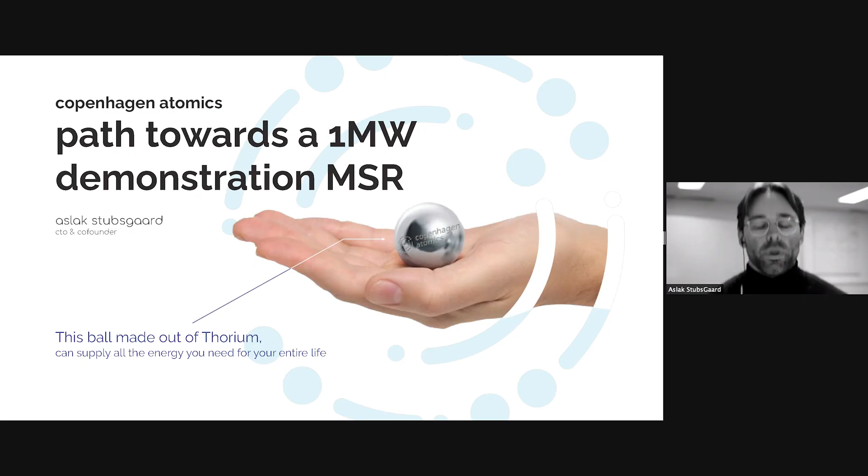I'm the CTO and one of the co-founders of Copenhagen Atomics. The company was founded back in 2015. All the components and systems that have to work together seem to be the risk of building reactors.

So we started building all the subcomponents that would go into that design, building the supply chain to build our reactor. Before building commercial reactors, we want to build a 1 megawatt demonstration reactor, maybe even several 1 megawatt demonstration reactors with different materials and geometries.

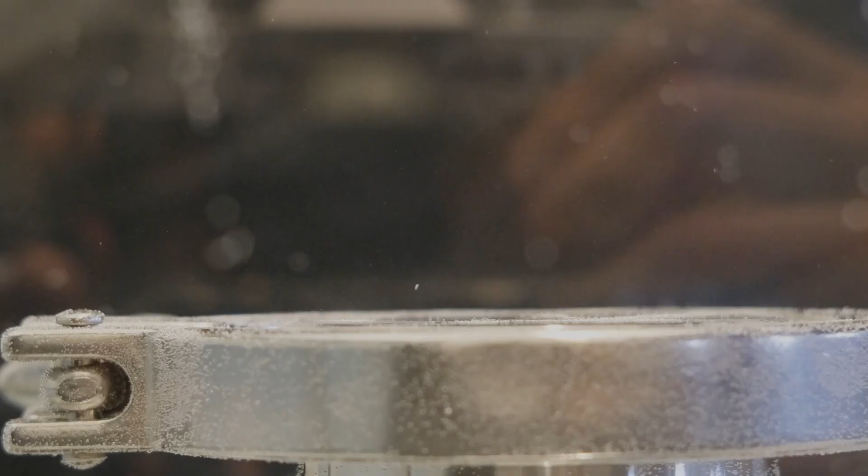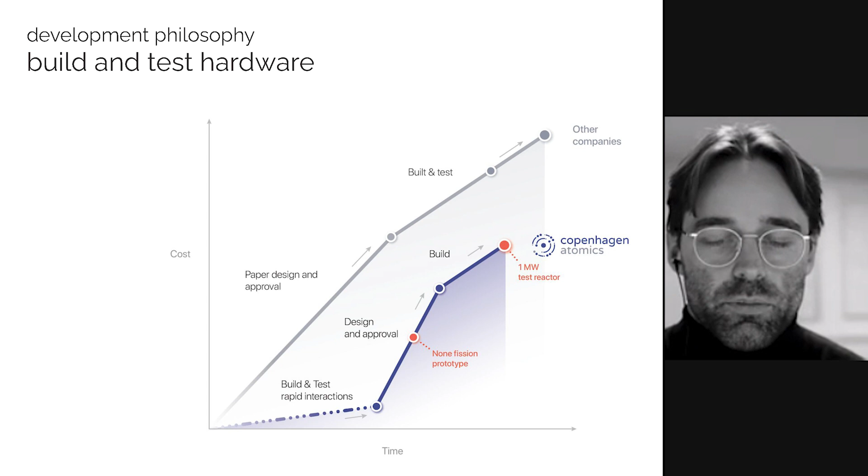We see this as an approach where we can move faster in the beginning and test all the components with inexpensive stainless steels and inexpensive salts before we ever get to any nuclear part where we have to involve regulators and any change becomes very expensive. Earlier this year, we then got funding to build a non-fission prototype for the next coming 2 years. We started building and selling these loops all the way back in 2017.

Here in 2019, we had basically all the components we need for a bare bones boilerplate non-fission prototype. This non-fission prototype is basically a 1-to-1 scale 1 megawatt demonstration reactor that fits inside of a 40-foot shipping container. It has all the same features, but scaled back. So for example, vacuum spraying, we might not implement that yet.

It's all the key components like pumps, core, the heavy water, and the separation materials. They might just be stainless steel in the beginning, and it might be a heat exchanger and the dump tank, the bare bones minimum of a 1 megawatt demonstration reactor.

We also sell these loops commercially, starting at 88K. So that's a bargain. Fuel salt loop inside the furnace that is then encapsulated in another shell. Both of those containments then have argon inert atmosphere. And then we have an air conditioning to keep all the electronics, actuating and VFDs cooled.

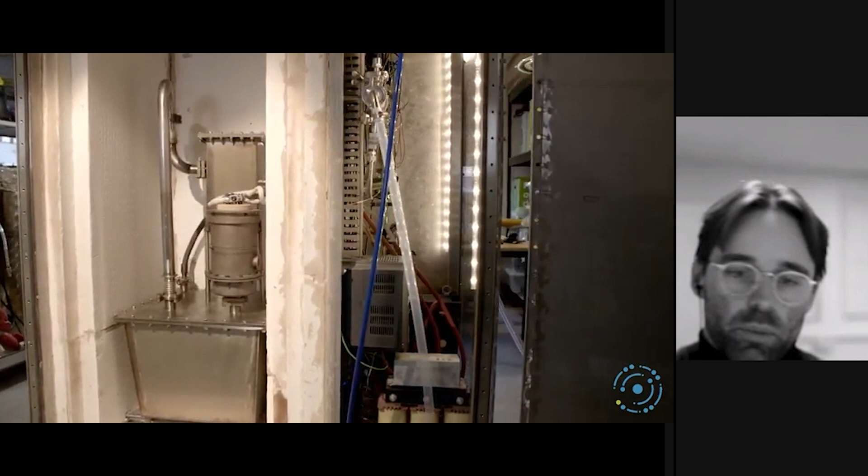Then you see here our older version of pump inside the loop; we can put in different components and pump salt around, run different tests with the different kinds of salts. We always start testing with water, and then we move on to nitrate salts, which is also what they use in the solar power industry, but that has a limit of 560 degrees Celsius. And then we move on to FLiNaK, which is our main testing salt for fluorides.

You see here an ingot we produce in 1 kilo batches, where we have to purify them before we can put them in the loop to eliminate moisture and oxygen. If we turn the light off, this is one of our pressure-fed loops with FLiNaK at 700 C. You can see it's glowing red hot.

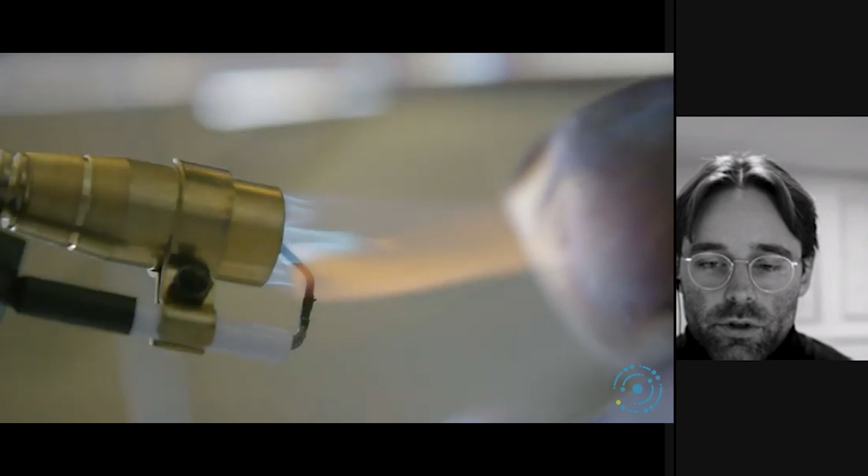This is showing nitrate salt. The viscosity and fluid characteristics are very similar to water. The nice thing about the nitrate salts is they allow you to test things without needing inert atmosphere. It's a lot easier to handle. They have lower melting points. Then we usually go on to FLiNaK and test with that.

Here I'm showing silicon carbide tubes at 900 degrees Celsius. We're getting tubes from different vendors and then stress testing them by dunking them into room temperature water, simulating a worst case accident in one of our cores if water spilled past its containment into the insulation layer and directly onto the silicon carbide.

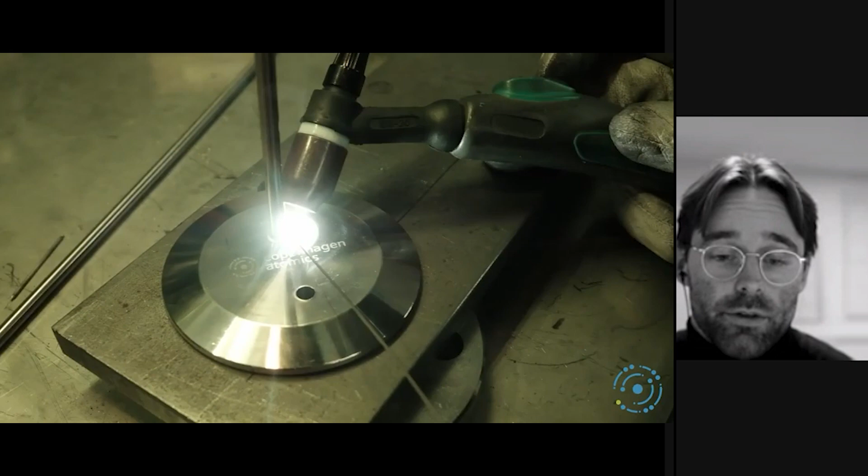We use Alfa Laval a lot for assembling our loops. They have world-class machinists and welders. We source all these parts, forged, investment cast, stamped, molded, assemble them here in Copenhagen and build these loops from them. We have something like 200 plus suppliers.

Molten-salt reactors, by their nature, lend themselves to be miniaturized and put inside of the size of a 40-foot shipping container. The reason we want to do this is because our whole goal as a company is to mass produce molten-salt reactors on an assembly line so we can have a reactor that can scale to meet global energy demand in the future. So the idea of the company is just that we build the reactor.

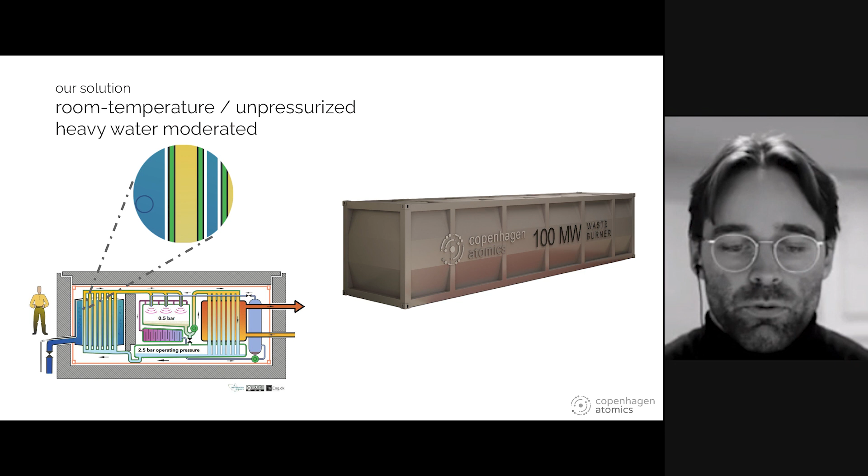We don't build any of the power conversion cycle, scrap the idea of a freeze plug and just have the salt go through the dump tank responsible for decay heat removal when it's under shutdown. Use vacuum spraying, which is spraying the entire salt volume just upon leaving the core to extract as much of the volatile fission products as possible. Recirculate the helium through scrubbers and filters to separate out the fission products.

If we just extract the xenon and krypton just upon leaving the core, because the fission products decay through multiple elements towards the line of stability, we can actually extract quite a big margin, up to like 15% of the fission products, if we capture them while they're being created. If we can then also extract some of the other volatile fission products, we extract a much larger fraction of the fission products, with the goal of a breeder in the long term.

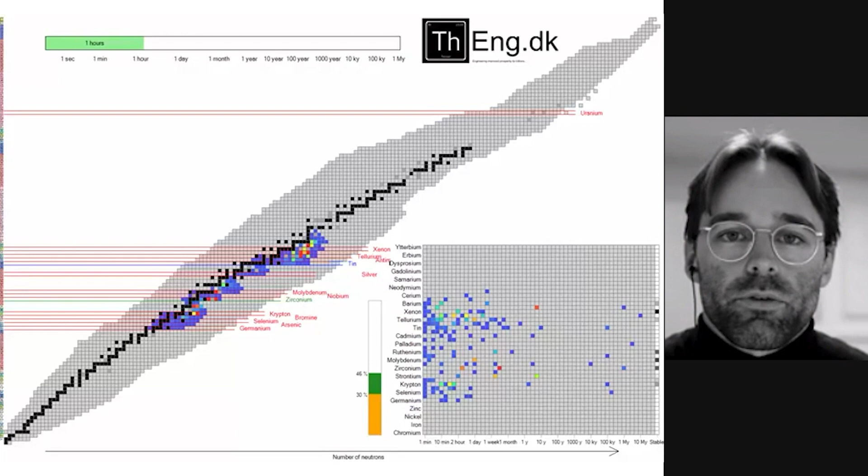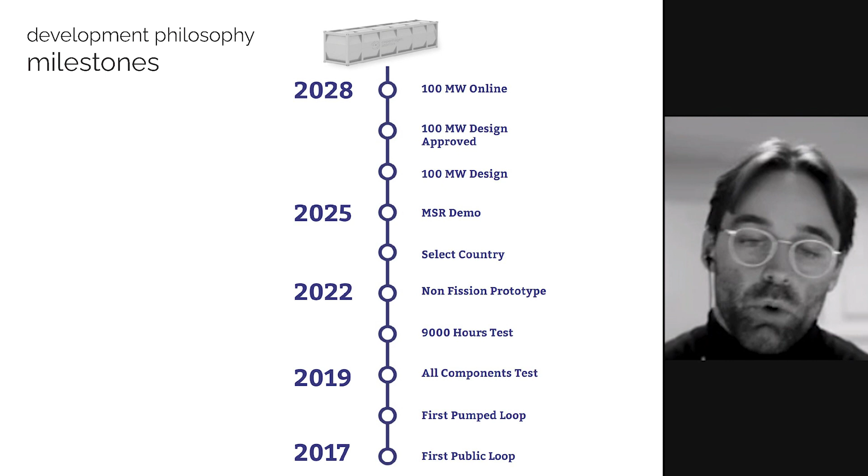And so you might think that this is trying to build something similar to what they did in the MSRE, but it's actually more akin to what they did in the Aircraft Reactor Experiment, which was they built a 2.5 megawatt thermal molten-salt reactor, small core geometry, and they only operated it for a couple of weeks. If we can only get approvals to operate it for a couple of weeks, that's what we'll do, but a couple of months if we're allowed to.

The key difference being, of course, that we want to use heavy water and then insulation material between salt tubes. We would like to use silicon carbide here or silicon carbide composites or some other variants of that, but if we can't get it approved in time, we'll just use stainless steel for the brief life of the reactor.

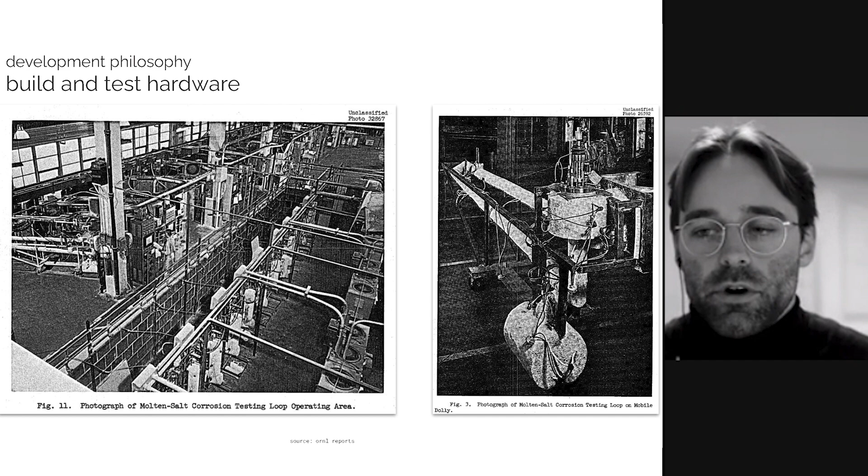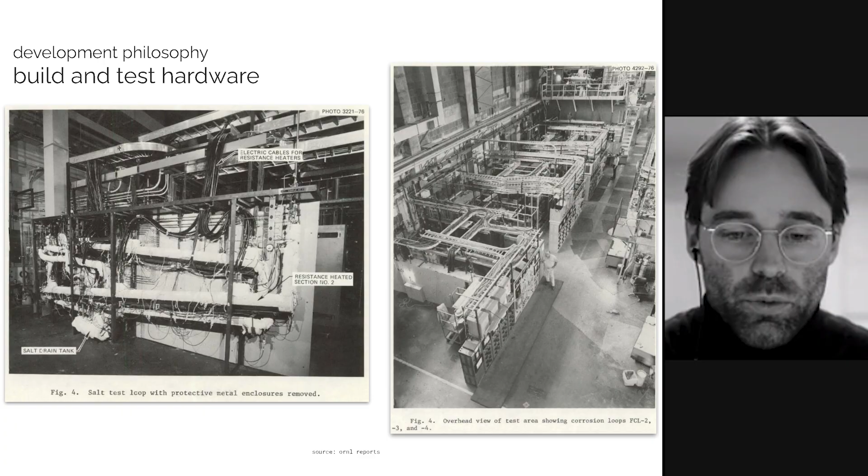And even after the MSRE days, buildings filled with loops. This is sort of similar to what we're trying to do. We're making the loops a lot more compact. There was a lot of piping between the different components. Our approach and design ideology is that our containerized reactors basically have all the electronics, heating system, and gas system management inside of tight containment. And you see here some of the loops we built since 2017.

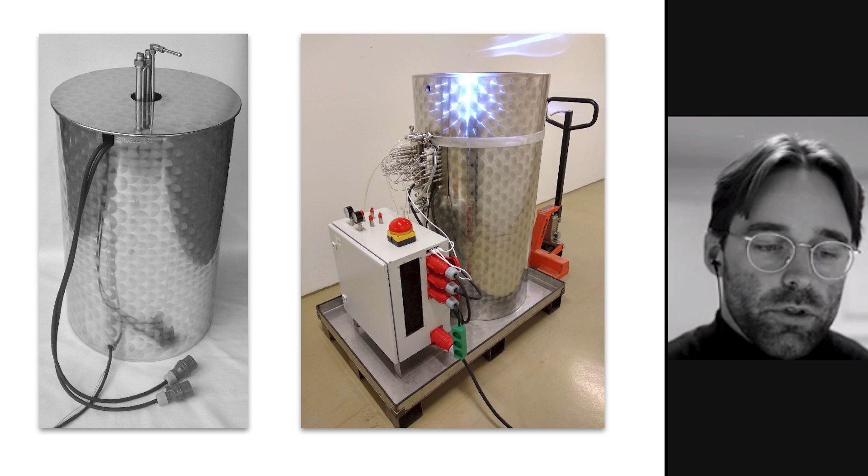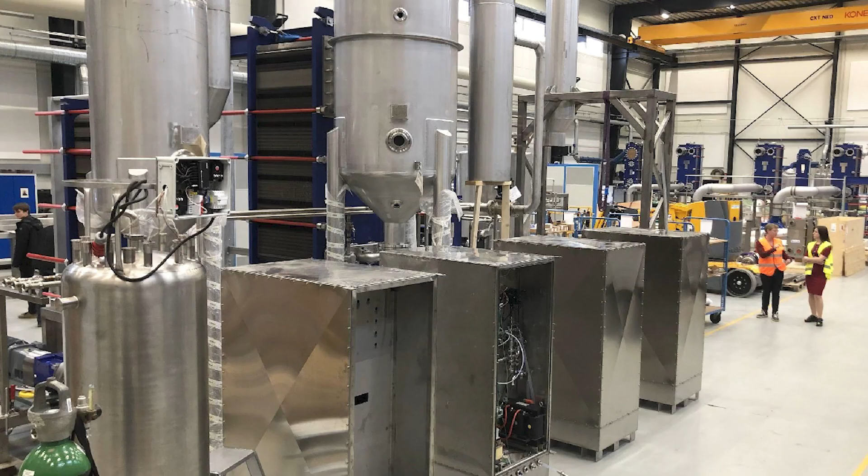The first one was a pressurized fed loop, and now we're currently on our fifth generation of loops, which has more or less the same capabilities as some of those loops you saw at Oak Ridge, just compressed down a lot more. We need a lot more of these loops, and we're happy with the design, so we're scaling the production of them. We're building some other systems, like a 500-liter solar salt loop.

What allows us to do this is our pump, a canned rotor pump, which is very different than the cantilever type pump they had in the MSRE days, which basically has a pump at the bottom, a long shaft and a dynamic seal, and then a motor at the top that you keep cold. This design is compressed into a canned rotor pump, so the rotor and impeller are together, actuated electromagnetically, and that allows us to just weld the whole thing up and not have any dynamic seals.

We're currently looking at building a version of this with electromagnetic bearings. It allows us to also levitate the impeller and rotor assembly on an electromagnetic field, so we don't have any wearing surfaces. Expect to get something like 10 years lifetime inside of reactor without any service, because there's no contact area besides the salt. We're basically testing and building all the small subsystems that we need to put inside of a 1 megawatt demonstration reactor, but first for our non-fission prototype.

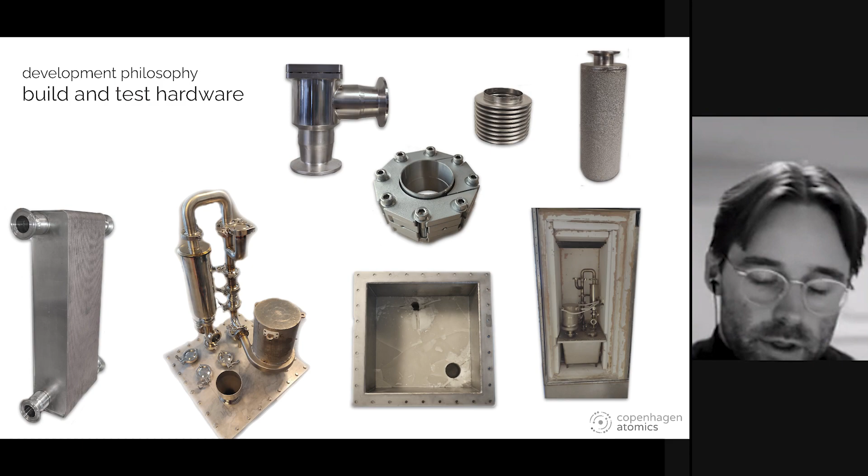And here you see some of the different components we're testing: heat exchangers, our newer pump and filters, valves, tanks, gaskets, that sort of stuff, roughly where the components would fit inside of a reactor. We're located in Copenhagen along with Alfa Laval, one of the world's leading manufacturers of heat exchangers. We're looking to use one of their plate heat exchangers up to 700 degrees C. So it's an all stainless steel brazed plate heat exchanger we expect to be able to use in our reactor, get a lot more efficiency out of that compared to classic shell and tube heat exchanger.

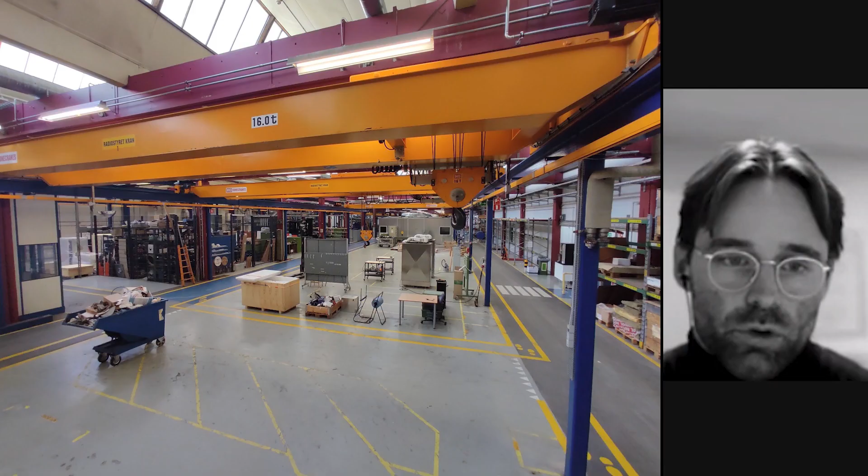This whole space here we're moving into, you can see some of our loops. We hope to have this whole room filled up with loops within the next year. We also bought a laser welder recently that we're going to install there to manufacture some of these more challenging parts. We also got approval earlier this year to run some of these loops with fertile salts outside of Denmark. I can't say which country yet. We're basically preparing for that by starting with some stagnant salt tests.

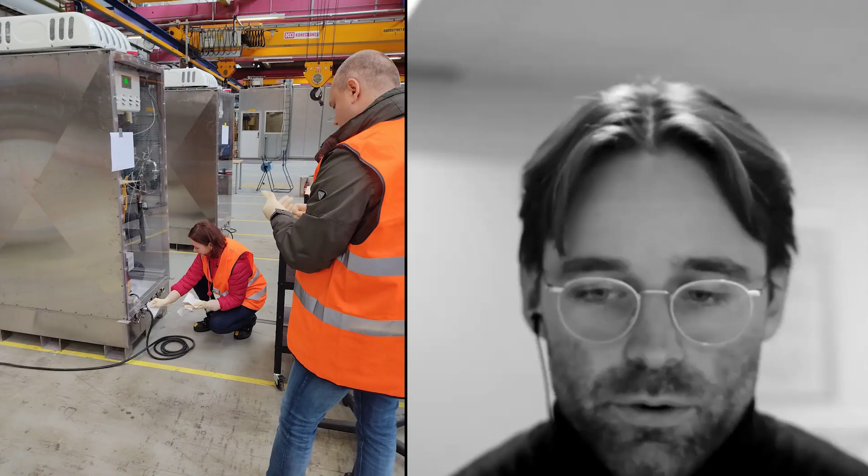So we have 3 different test setups. This is basically all the electronics, data acquisition we need to test flanges and basic corrosion before we start pumping salt that is fertile in one of our loops. This also caught the attention of the IAEA. 2 weeks ago, we got a safeguards visit from the IAEA inspectors that took swipe samples and made sure we weren't doing anything we're not supposed to, which of course we're not. But yeah, that was a very friendly visit.